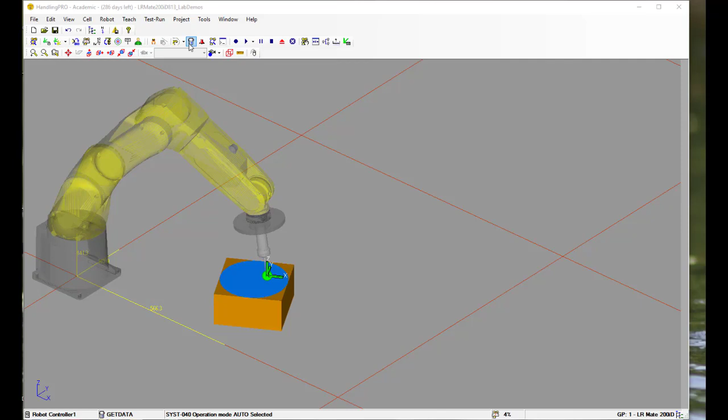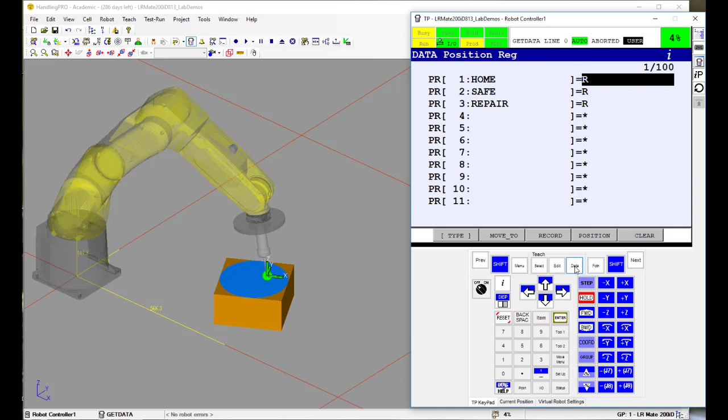and so the first thing I'm going to do is, anytime I start a new program, I need to put the robot into a neutral position. And last time I showed you how to do that by jogging. This time I'm going to show you an easier method. If you go to the data input in a previous lab, now actually it might come up looking like this. When you hit data, it might come up showing registers. And so what we want to see is the position registers.

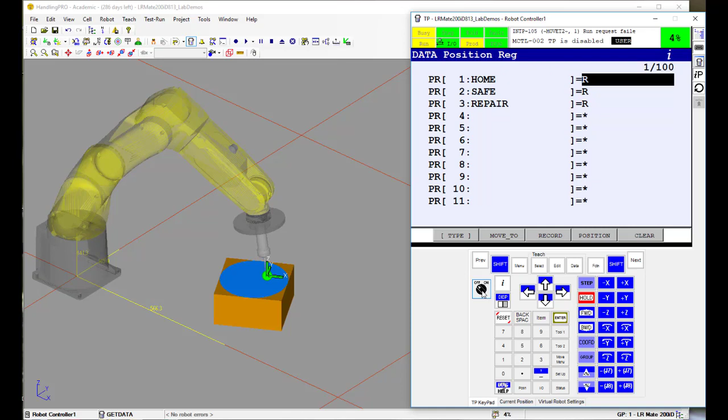Now in lab 10, you should have created the home, safe, and repair positions. And so I've got a home position here, and if I go shift move to, oops, teach pendant is off. Let's try this again. Shift move to. That's my current home position. Now, that's actually pretty good, but I'm just going to show you something before I move on.

If I go to this R and click the position button, I can manually enter in the joint values of that position. So I can just type in 0, 0, 0, 0. Now joint 5 I don't want to be 0, I want it to be negative 90, so it's pointing down, and then joint 6 is 0. Then click done, and now if I do a shift move to, it'll just readjust itself a little bit. So that's a perfectly neutral position, and that's always a good place to start.

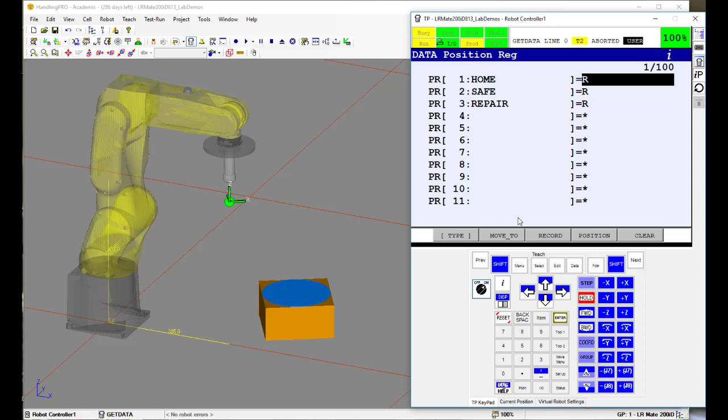We know that joint 6 is at 0 degrees, so it's not rotated too far. The pointer is pointing straight down, so that'll help us avoid getting into singularity. Okay, so that's going to be home position. Let's get started with the program that we're going to write.

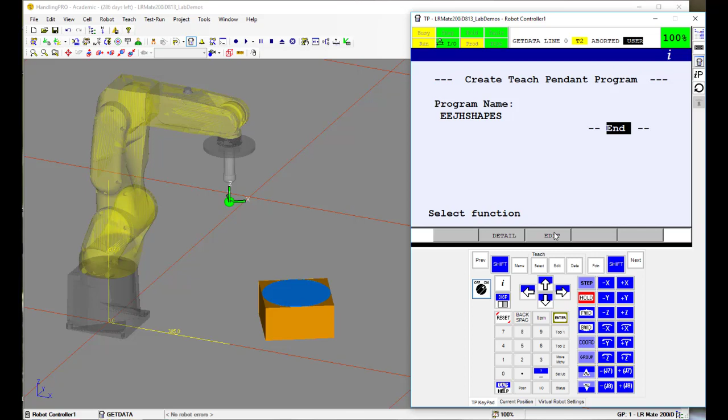So I click select, create, and I want to type in a name, so I go options, keyboard, and I'm going to call this shapes, but I'm going to use my initials EEJH because as I create more programs, it'll help keep them alphabetically grouped together. So we just click edit, and now we're ready to start.

All right, so the first thing I need to put in the program are the two commands that define the user and tool frames that are being used. So I'm using tool frame 1 and user frame 1. So over here I just click instruction, forward arrow over to offset frames, and the command I want is user frame number equals, and I click constant, type in a 1, enter.

And then same thing here, I click over here, whoops, I got the wrong command, let me try that again. So, all right, forward arrow, offset frames, and now user tool number, constant 1. Okay, so that sets my user and tool frame. The second thing I want to do is I hit the forward arrow here to get over to where I can start recording points. My first point is going to be the home position.

So shift point, and it records it as a regular point, but I want it to be my position register point, home position. So I click on top of the 1 where it says point 1, go to choice and click PR, type in 1, that's the position number for my home position. I also labeled it home, so the label shows up here. So that's going to be my starting point.

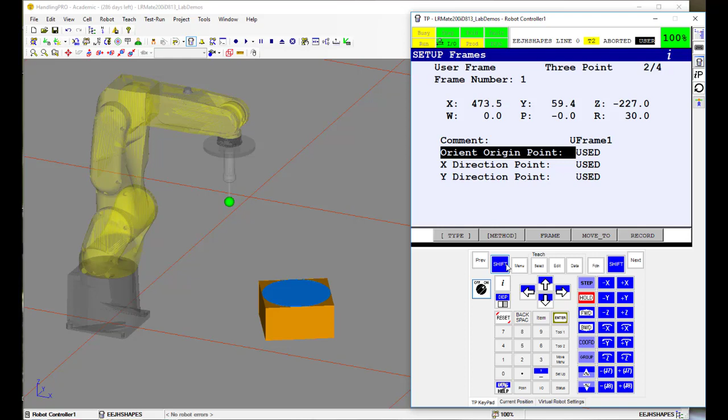So to do that, I go to Menu, Set Up, Frames. So here are my 3 points, and I can move to any one of these 3. I'm going to move to the origin. I highlight it, Shift, Move to, and it goes right down to that point.

Okay, now to get back to my program, the quickest way to do that is to hit the Edit button. Click Edit, I'm back to where I was. And so this is actually going to be this first point in my square. So I go Shift, Point, and now when in the program it started at home position, it's going to move down to this point.

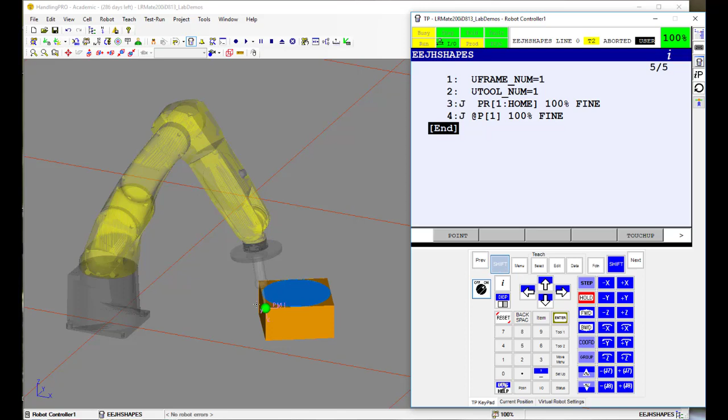I want to keep it as a joint move because it doesn't have to be a straight line, and I always want to use joint move whenever possible. I only use linear moves when I'm wanting to do a straight line. So now what I'm going to do is actually create the points not by jogging, but by actually entering them in. So I'm going to pause here, and there's a separate presentation that is going to be starting up after I pause that shows how to get the geometry of this shape.

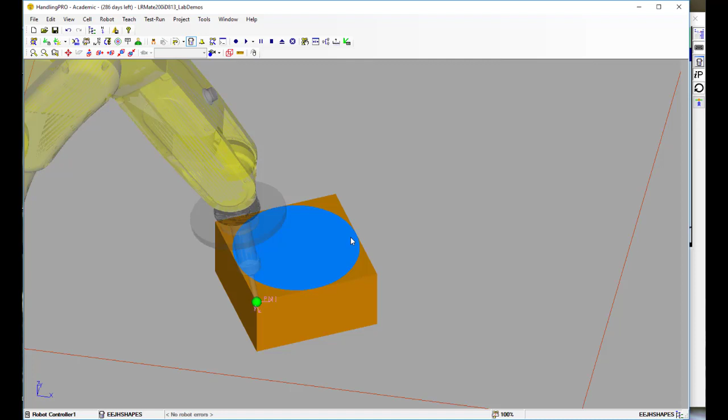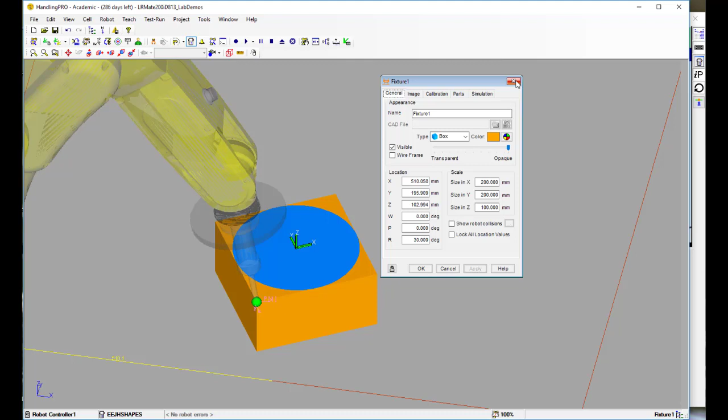Before we go there, I'm just going to show you very quickly how if you have a fixture in Roboguide, if you double click it, it brings up the properties of this fixture. Now it tells me right here, this square shape is 200 millimeters across in X, and it's 200 millimeters in Y, and it's 100 millimeters in the Z direction. So those are the dimensions I'm going to be using when I get my points. So let me just pause the video at this point.

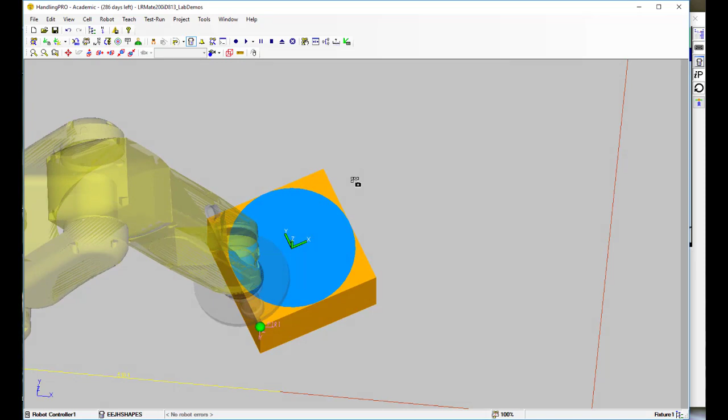Okay, there's actually a separate video that goes through the geometry of how to figure out the points here, but I'm going to let you watch that if you need to. But what I'm going to do here is, if we look at this as if we're looking at a graph, now it's tilted, but remember the X direction is this direction, and the Y direction is this direction. And as I mentioned before, the square is 200 millimeters in the X and the Y direction. So my next point is going to be here at this corner.

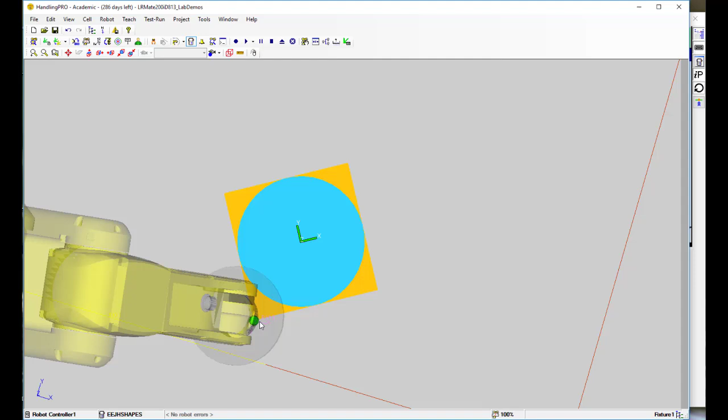So if you think of this, let me just tilt it up so it's a little bit more, oops, sorry, come on. There we go. So it's kind of straight the way we look at it. So this is the X-axis. So I'm going to enter this as a set of coordinates. The origin of the frame is the 0, 0, 0 point. So this corner is 200 millimeters in X, 0 in Y. So that'd be 200, 0, 0.

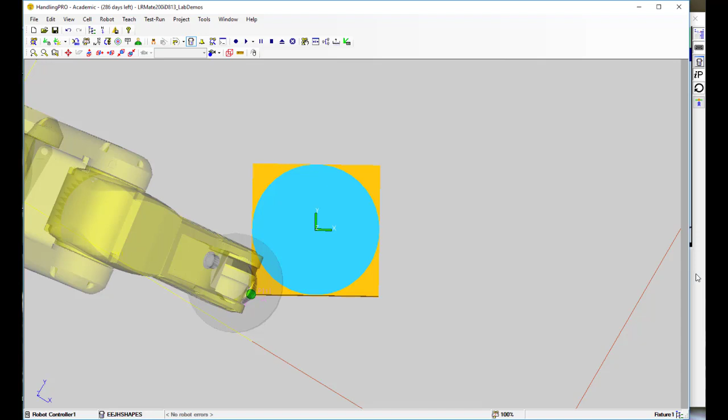This corner here is 200 in X and 200 in Y. So it's 200, 200, 0. And this corner here is 0 in X and 200 in Y. So that's 0, 200, 0. So I'm going to go ahead and create those 4 points in the program by just entering numbers.

So first thing I'm going to do is I need a linear move. So let me just go back here. If I hit Shift Point, it will record the current point with the default motion. If I hit the point command, I can then pick from the list of motions. So I'm going to pick this one. It's a linear move that I want because I need it to be a straight line. I want fine termination, so it actually reaches the point and gets to that point before moving on. So I'm going to click that one.

I'll change this to 200. 100 is a little too slow, so 200 is good. Okay, now the point right now is where it is right now, but I can go in and manually change the value here. Okay, so my next point, point 2, is going to be this corner. Now let me just show you. If I go to point 1 and I click position, you see that's 0, 0, 0. That's where it is right now. The next point is going to be 200 in X and 0 in Y.

So all I have to do is click position, type in a 200, okay, and that's point 2. Then I can teach the next point. Oops, I did it the wrong way. Shift point. All right, point 3 is this next corner. That's going to be 200, 200. Teach another point, point 4. That's going to be this far corner. That's going to be 0, 200.

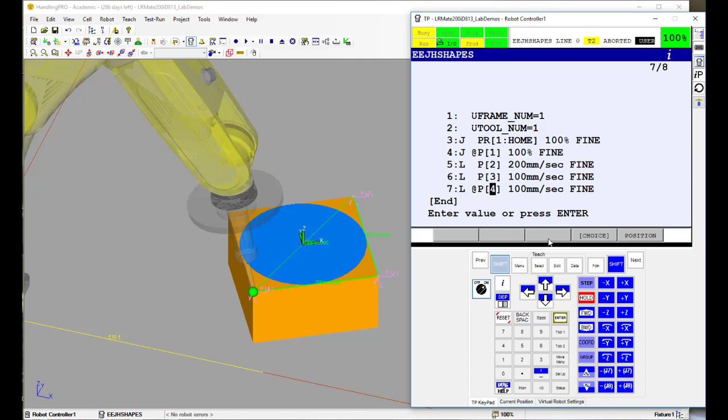And then the last point is going to be back to where I started from, which is point 1. And then the last thing I'm going to do is go back to home. Now the move to home should be a joint move because there's no reason for it to be a straight line. And then I just choose the position register, type in 1, and there's my home position.

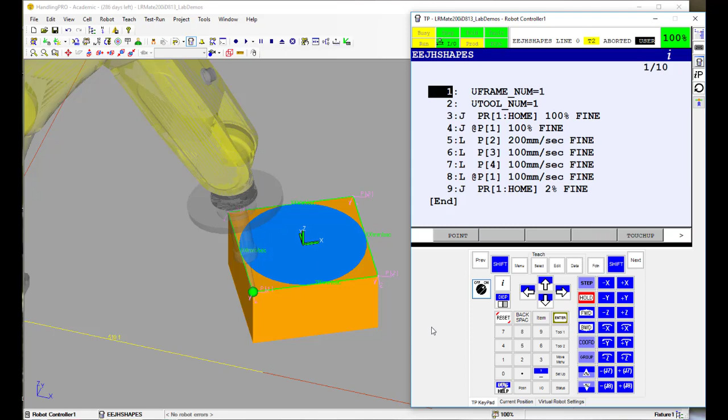All right, so let's go back to the top of the program and we'll put this in step mode and try it out, see if it does what we think it's supposed to do. Shift forward. It just set the user frame and the tool frame. Now here's the home position. Okay, the first move is move to the first corner. There's one side, there's the second side, third side, fourth side, back to where it started, and then back to home.

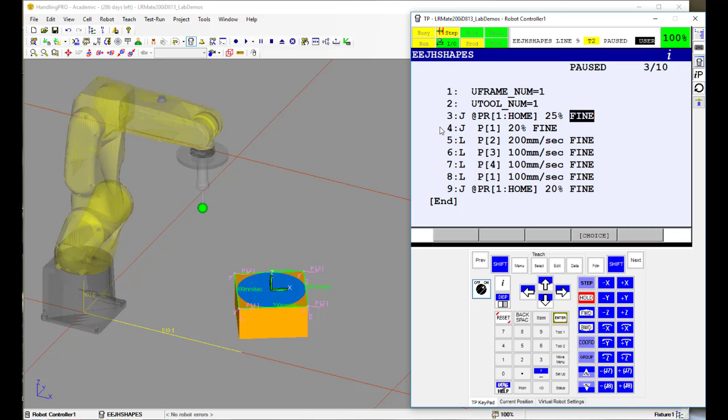Now, not sure how that became 2% fine, but I'll change that to 20%. Okay, so there's my square. I'm going to now get it out of step mode, and we'll try it in the cycle start mode, make sure it does a nice job of making straight square sides.

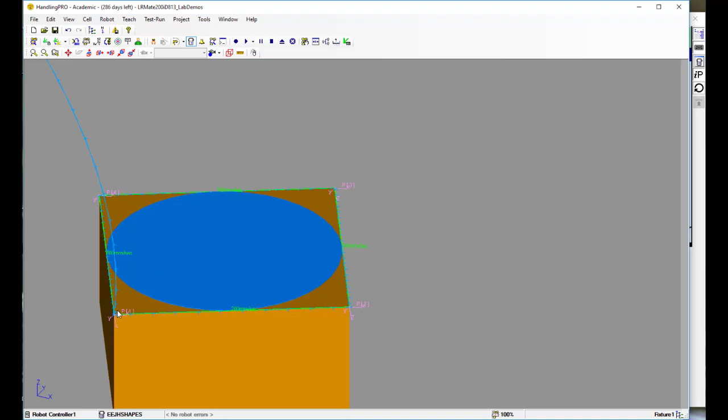Okay, so you remember that the accuracy that I have in my user frame was what allowed me to create points by just entering coordinates. And as long as my user frame is accurate, those points are going to be very accurate as well.